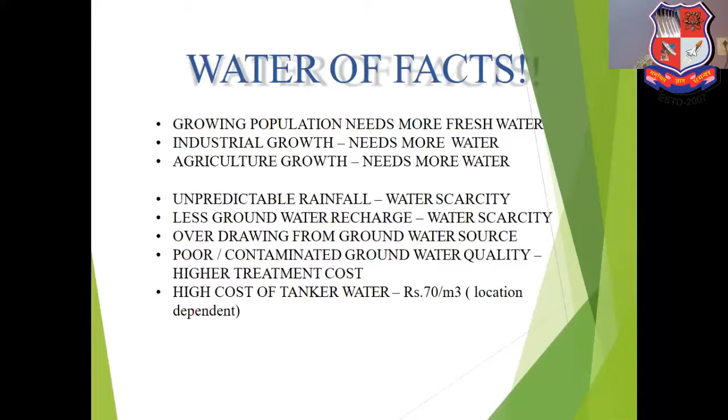Whereas high cost of tanker water is 70 per meter cube, or we can say where the water or groundwater is not available, they buy the water. As we have reached that stage where we need to buy water, that rate is also higher.

Now if we don't preserve water or save water from now, or if we are not aware of saving it, then in the near future that will be a threat to our existence. If groundwater recharge is not done on a constant basis, and rainfall is also uneven, we still need daily fresh water for survival. So if we don't preserve, clean, reuse or treat water, it will lead to a threat to our existence in future.

Then quality of life is also affected if we do not get pure water or good water for bathing or regular use purposes. We don't feel the quality of life is good.

It is also a threat to business, because every business or industry mandatorily requires water for its start. If this water is not there, it will lead to closure, migration of business, limitation of expansions, higher capex and opex, impacting industrial growth, which will lower down slowly and gradually.

Now there is a limitation on agricultural growth for want of water. If water is not available, we can see our farmers constantly demanding the government for release of water from canals. So if this water also falls low, there will be a decrease in the agricultural growth of our India.

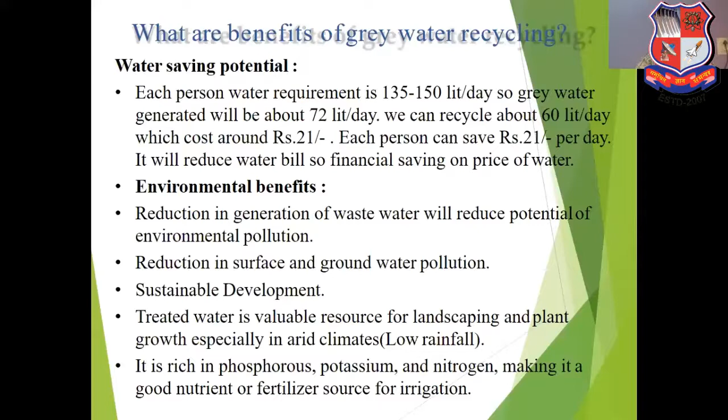Now what is grey water and its source? Grey water is all that wastewater that is discharged from a house, excluding black water, that is toilet water. So without toilet water, all the water which we discharge from our house can be said as grey water. It includes wastewater from showers, bathtubs, kitchen, floor cleaning, dishwasher, laundry tubs and washing machines. All this kind of water which we discharge from our house can be treated and reused.

So grey water can be divided into two types: low load, like showers, bathtubs or hand wash basins, or high load, like kitchens, dishwashers or washing machines.

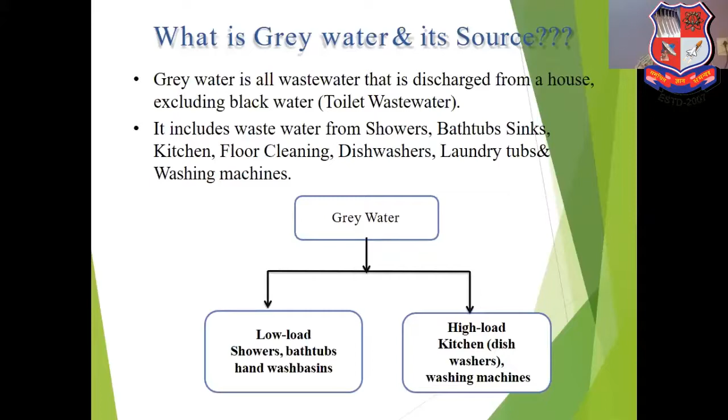Now what does grey water contain, what is its content? Grey water generation is clearly dependent on the living standard of the people, and it's a result of personal hygiene, the detergents they use, the cosmetics they use, as well as whether their clothes are dirty or more dirty.

Now grey water contains soap, shampoo, toothpaste, food scraps, cooking oils, detergents and hairs, kitchen waste, water from floor cleaning, etc. Dishwashing and floor cleaning mainly contain phosphorus and sodium bicarbonate, because we use powders, detergents or soap for cleaning our utensils as well as clothes. Now kitchen waste contributes to organic loading, so an increase in BOD load.

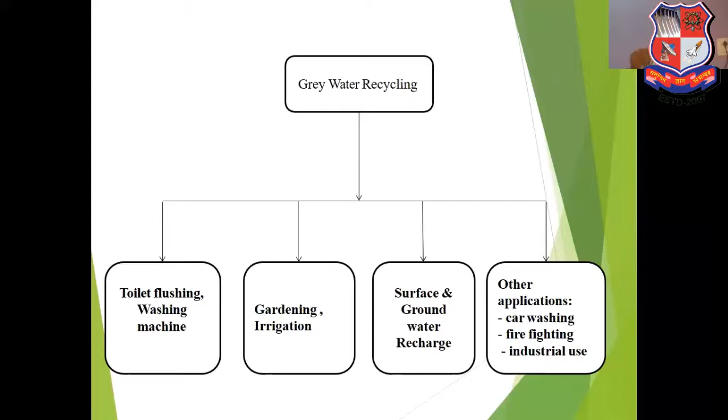Now grey water recycling can be done for toilet flushing, washing machine, gardening, irrigation, surface and groundwater recharge, and other applications like car washing, firefighting, and industrial use. This depends on the generation or outcome of the grey water from a source, which can be used according to the applications we have shown here.

Now, what are the factors influencing grey water reuse? If we are considering a household grey water treatment, the budget is low. But if we reuse or treat grey water from an industry, the quantity or amount of water discharge is more, and accordingly the grey water use there can increase marginally. So we'll look at the factors which influence grey water reuse.

The first one is budget. It is dependent on which type of treatment we are providing. It may vary from a low cost to an expensive treatment. So budget is the most preferable and prime financial factor for grey water reuse and its treatment.

Now, existing plumbing - grey water and black water collection pipes should be separate. This is a natural requirement before treating grey water, since toilet water cannot be used for recycling, so the plumbing systems or pipes should be different or separate.

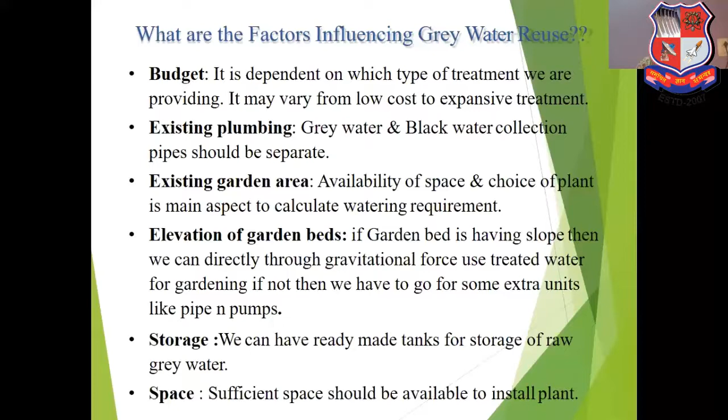Now, storage - we can have ready-made tanks for storage of raw grey water. This is also a requirement for storing the grey water. Then there is space - sufficient space should be available to install the plant. If the plumbing system is in a congested area, it should be extended or reconnected and made separate, and the required space should be available for the plant to be installed.

Now, how do I collect grey water? First we have to do identification of the water - separation of drinking water, grey water, and black water pipes, and clear labeling of the taps and devices should be there for reuse. That is the foremost requirement.

And diversion systems - grey water cannot be stored for more than 24 hours. It has to be treated through filtration and disinfection. This point is to be remembered when treating grey water.

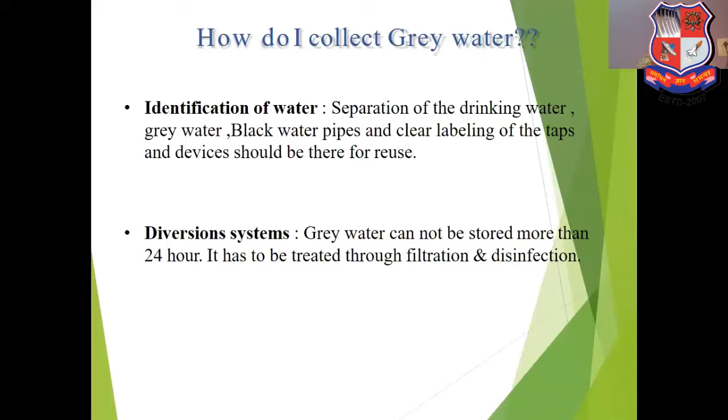Grey water treatment technologies depend on the plant site. Before executing a house or industry, we plan whether we want to reuse water, or if the house or industry is already established and we are introducing the grey water treatment plant afterward. Available space needs to be examined first, along with client requirements or user needs, and investment and maintenance costs, that is, budget, which also needs to be considered before installation.

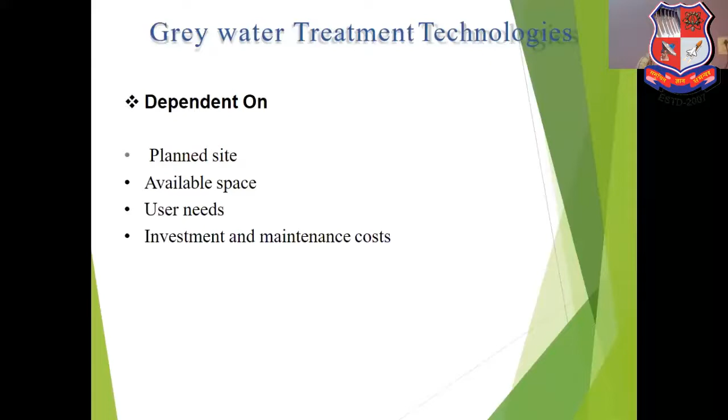Then it enters the oil and grease trap, and from there passes to the sequential batch reactor or bio reactor chamber, where the water is treated and cleaned, and the suspended particles or turbidity of the water is decreased. Then it is installed in a clear water tank for storage of the grey water after clearance, and from there it moves toward a filtration tank.

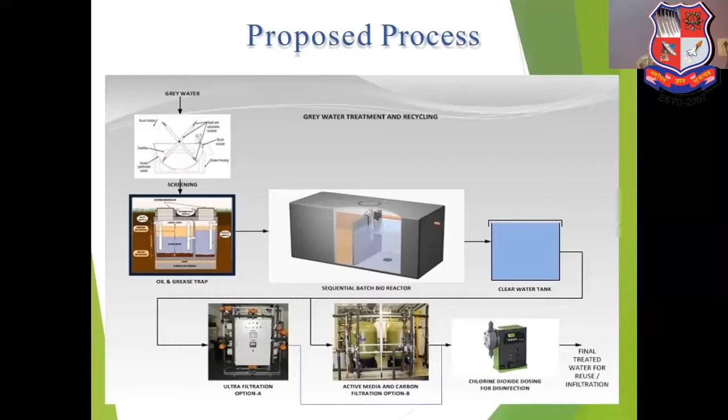Here we have two filtration options: ultra filtration tank or active media and carbon filtration tank. These can be used according to our need and plant setup, whether residential, commercial, or industrial, and according to budget. After the clear water tank, water reaches the filtration chamber where disinfectants are applied and water is made clear for use. Then it passes to chlorine dioxide dosing for disinfection, a routine process needed before supply. After chlorination, the final treated water is available for reuse.

Now let's look at how to install a grey water treatment plant. I will read out the technical requirements that need to be looked out for.

Grey water should not be a source of bad odor. It must be free from color and suspended solids. Grey water pipes should be permanently color coded and labeled, this is an important point to note. There should not be a cross connection between drinking and treated water. Municipal wastewater should not enter the grey water recycling system.

All mechanical equipment and treatment units should be easily accessible for cleaning, repair and maintenance. Skilled installation of the treatment plant should be done to avoid errors. Storage reservoirs should be kept away from direct sunlight to avoid possible growth of algae.

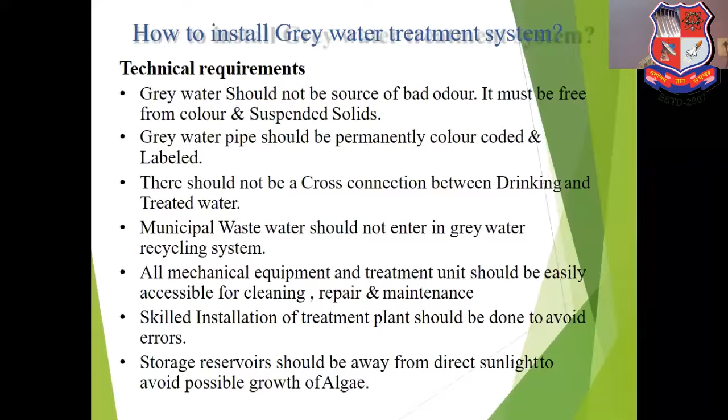Now, what precautionary measures should be taken when using treated grey water? System overload should be avoided, the system installed at a certain demand or level should only be supplied water up to that limit. Less polluted grey water sources such as showers, bathtubs, and hand wash basins should be preferred for treatment and reuse over kitchen or laundry grey water. Grey water should not be stored but used immediately or within 24 hours.

When used for gardening, grey water should be applied to the subsurface to avoid any contact with it. Grey water should not be applied to fruits and vegetables that are eaten raw. And when used to water the garden or for irrigation, no sprinkler should be used while gardening with grey water.